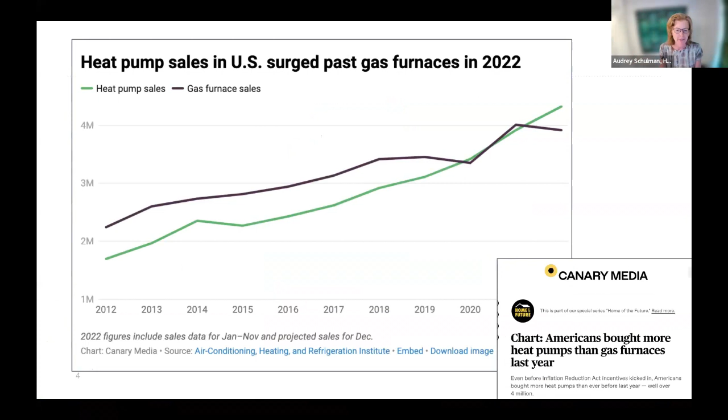So currently in this moment, a lot of us are loving heat pumps because they provide both heating and cooling, and they're a method of reducing our emissions by moving to electricity in an extraordinarily efficient way. So last year, heat pumps actually began to sell more than gas furnaces, which is thrilling.

So the problem with this is that overall, over the 20-year program of doing these pipe replacements, they will be spending more money than the gas infrastructure in the ground is currently worth in its depreciated state, right? And the cost of this infrastructure is amortized over decades and across all gas customers. So our kids and our grandkids are going to have to pay for this stuff.

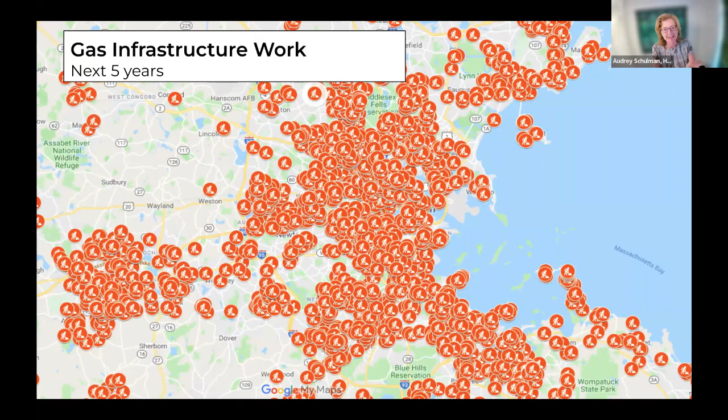And it's totally running counter to our state's net zero emissions mandates. So this is crazy, but the gas utilities have to do it. They're told to do it by the state.

And meanwhile, we have those gas customers who are moving one by one to air source heat pumps, right? And each one of them getting off the gas system does not in any way reduce the gas system's size or operations costs, right? So there's fewer and fewer customers sharing the costs of maintaining that gas system, meaning each person getting off the gas system is increasing the cost for everybody else.

At some point, there's going to be an inflection point hit where gas is going to become more expensive to heat with than air source heat pumps. At that point, there's going to be a rush to get off. The only people left in the end will be those who are low income and renters. They're going to be stuck with just shouldering skyrocketing gas bills. That's not the way we want to transition.

So HEET sort of figured out some of these problems back in 2017. And we began to pitch to gas utilities the idea of instead of installing new gas infrastructure, why not try installing networked ground source heat pumps? I mean, how awesome would that be?

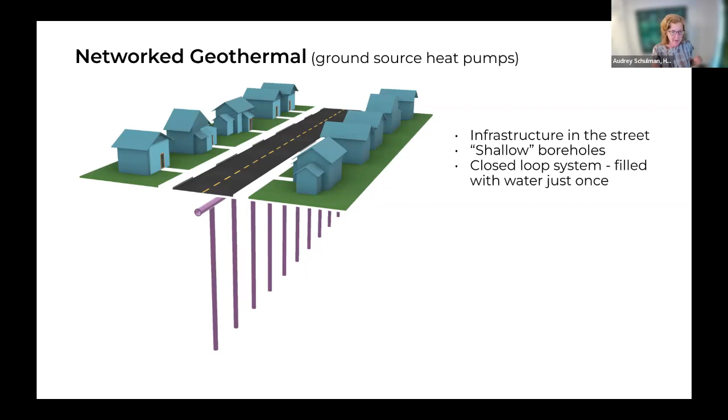So just want to restate, even though we use the word geothermal, it's not going down so far that it's into lava. It's not creating electricity. It's not creating steam. It's not a single building installation of ground source heat pumps, but instead it's networked together.

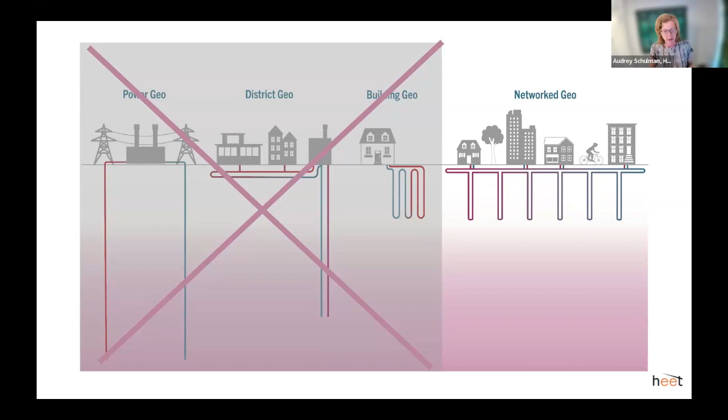And the reason why that's important, I'll get back to that in a second. One of the reasons why it's important is because then the gas utilities can transition whole streets at a time.

And getting economies of scale, everybody in a neighborhood, maintaining that incredibly important ratio of gas customers, or thermal and gas customers, to infrastructure, so that you don't get those skyrocketing energy bills for that last grandma. The other outcomes: it would be safer because it wouldn't have gas in the pipes, right? We all remember the Merrimack Valley gas disaster.

The energy bills, the heating bills, are actually predicted to be lower this way, because currently about half of your gas bill is just paying for the fuel and half of it's paying for the operations and maintenance. And so if we go to this system and the gas utilities install it and amortize it the same way that they normally do, you have the operations and maintenance, but that fuel cost, the gas, goes away, right? So you only have a minimal amount of electricity that you're paying for, because this is the most efficient system known for delivering heating and cooling. And that's why Applied Economics Clinic predicted that the heating bills in Massachusetts should be lower over time than gas.

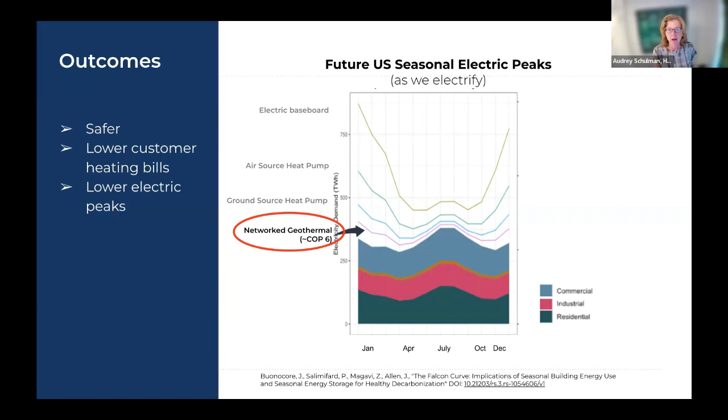And that COP of 6, in case anybody's interested: COP means one energy unit goes in and 6 energy units come out. So you move 6 units of energy into or out of your building for every 1 unit of energy you use. And that comes from an Xcel Energy case study of Colorado Mesa University, which will be out soon, where they look at the actual energy use. And that's the COP they're finding. It's quite amazing. It is incredible.

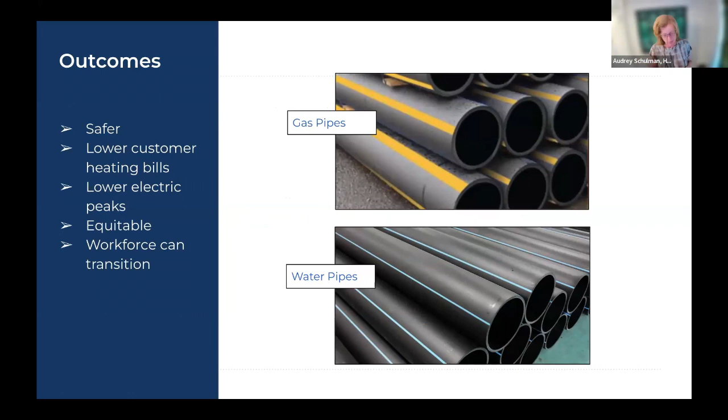Anyway, it also would be very equitable because you're going straight down the street, helping everybody to transition to renewables, and the workforce can also transition because the pipes are exactly the same, right? So they already know how to operate and maintain them. They already know how to install them. And that's why both the pipe fitters nationally, as well as the steel workers in Massachusetts, support this idea.

And finally, of course, the emissions would be lower. So we did a study with Buro Happold. They found that any building connected to the system, as opposed to gas, would reduce its emissions by 60% immediately, and that those emissions, of course, would decline over time as our electric grid moves towards more and more renewables.

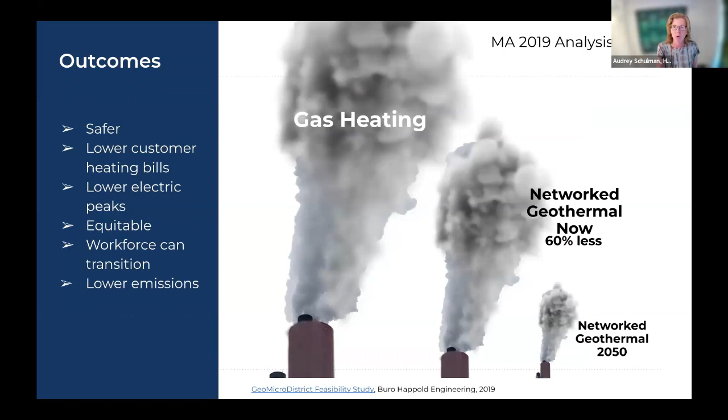So luckily, the gas utilities are actually installing this. Last Monday was the groundbreaking for the first installation with Eversource. It's in Framingham. There's a fire station, part of a school, a few businesses, and a lot of homes. I think it's over 150 units in total, businesses and homes. The installation should be complete this year before the winter season.

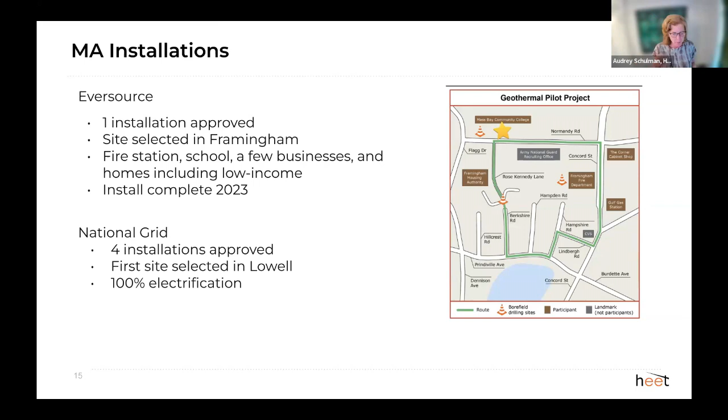And National Grid has 4 different installations approved. The first site is selected in Lowell. And in those sites, they're going to actually be taking all the gas appliances out of the buildings and replacing them with electric appliances. So this is a gas utility that will be electrifying. It's sort of amazing.

So the idea is catching on. There are now feasibility studies or proposed installations in all sorts of different states. Over 100 proposed installations in California alone, which is just breathtaking. There's some legislation that's been passed in New York, the Utility Thermal Network and Jobs Act. It was passed in just 2 months because it was pushed by the trifecta of gas utilities, unions, and environmentalists. Such an unusual situation.

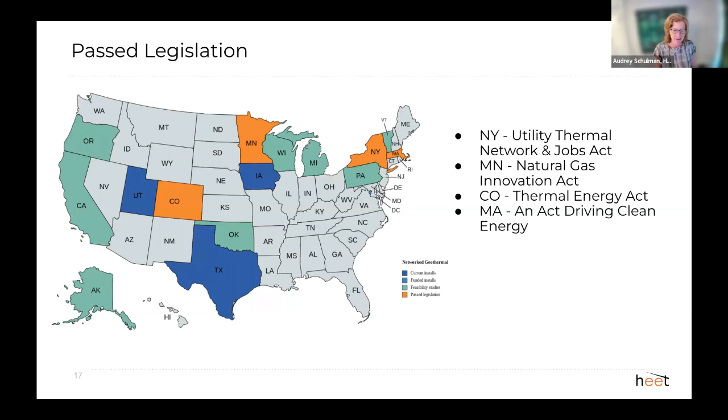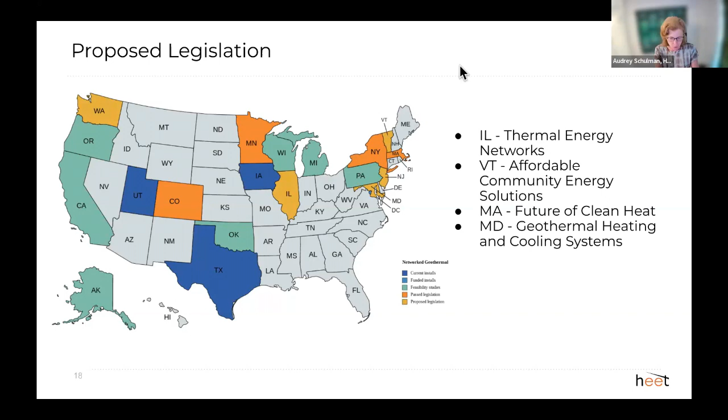There's a lot more proposed legislation, including in Massachusetts, the Future of Clean Heat, which would do all sorts of things to allow gas utilities the opportunity to evolve, without actually, if they screw up, right? But it would give them the opportunity to evolve. There's a lot of supportive advocates working nationally to push this further.

And strangely, and this is one of the strangest things, HEET's been somewhat pushing against gas utilities for almost a decade now. And so it's very strange for me to say that there's actually a gas utility coalition that has formed. There's 14 of them in the coalition, last time I heard. These are all the utilities also that have contacted us, including at this point Gas Technology Institute, which is the research arm of the gas industry. They are doing outreach for us about this idea. It's sort of just mind-blowing.

And in terms of what might interest you, in terms of either community-based or your building or your synagogue or anything, this is the Inflation Reduction Act. You can get up to 50% tax credit if the installation goes with fair labor practices, if it's an EJ area, and if it's with US made materials.

And there's also the Energy Infrastructure Reinvestment Act, which in terms of gas utilities or municipalities or other bigger installations, you can get very low interest rate loans from the Loan Programs Office to do this work, and then use the savings in terms of that decreased interest rate to move it towards customer building retrofits, which is incredible. So

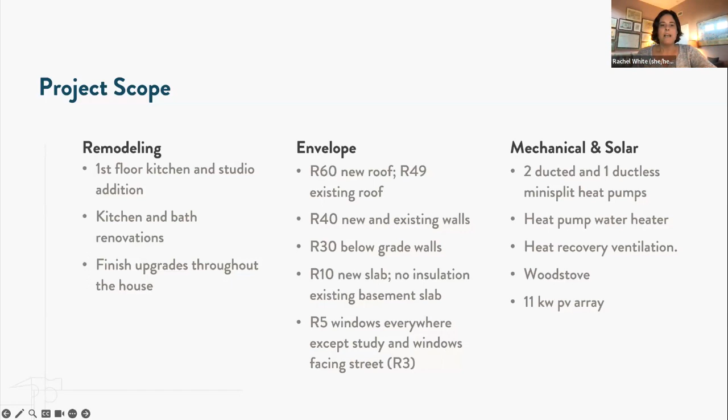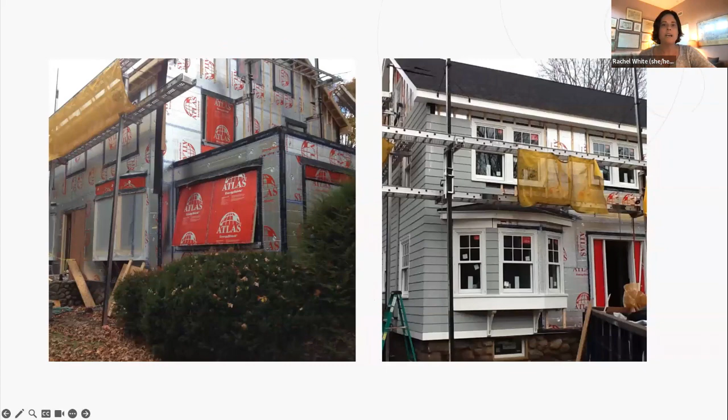We also simplified the building form. If I go back a couple of slides, you see it was a Dutch colonial and we turned it into a regular colonial. But in any event, coupled with the high performance windows, the air sealing that we did, it's a really tight building enclosure, very well insulated, very comfortable with very low heat loss. And the results are really dramatic. Annual energy use was cut by about 75%. Carbon emissions went down by 60%.

I included here the average home in Massachusetts' annual energy consumption, and it's 88 million BTUs a year for you nerds out there. This is from the 2020 Residential Energy Consumption Survey, or RECS. You can Google it. Not all the data is out for that survey, but there's a lot of it, and they stopped doing state by state breakdowns during the Trump administration, but they're back to doing that again. So there were a couple of RECS cycles that did not have any state breakdown data, but now they do. So anyway, I was able to incorporate that.

So this house is using 2/3 less than what the average home in Massachusetts is using. And in its first 8 years of operation, those solar panels have produced 40% more energy than the house consumed. So they're a net positive home, and they built up credit with the utility. This project is extraordinarily successful, not just because it's so low energy, but it's also incredibly comfortable. It's just a better house. It's more resilient.

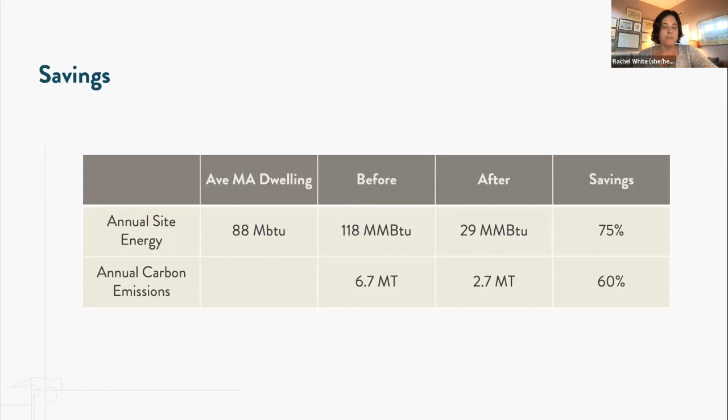And so you might think that we went on from this project to do many more deep energy retrofits, but that's not the case. In fact, we did just one more after this. That was in 2017, and that was the last one. So why? There are a few reasons why we stopped, why we no longer do deep energy retrofits and no longer really recommend this as the most sensible or the best approach for most homes to decarbonize.

The first is that what we have found is that they're incredibly high cost. There was a time back in the late 2000s and early 2010s to 2015 or so, where there were lots of utility incentives for super insulation. Once those went away, it was really hard to convince people to spend money on this. And we found that even if you don't factor in the new roof or the new siding, you're talking 2 times more, sometimes 3 times more the cost of just insulating within the cavities.

Waste: in some cases, roofs have a usable life, an asphalt roof of maybe 20, 25 years, but that's often not the case with some older siding, with some windows that can be refurbished and you can add storms to them. It's not the same as having a triple pane window, but we found ourselves, to do these projects, recommending that people throw away material that has lots of usable life left in it.

Also, as Audrey discussed, it became clear within the past 10 years or so that we need to electrify everything in order to achieve our climate reduction goals, that using less energy and decarbonizing the grid is not enough. We also need to change all of our end uses of energy as much as we possibly can, but especially buildings, to electricity. And then the last reason why we stopped doing deep energy retrofits is because of the upfront carbon emissions associated with doing this work, particularly with foam insulations, which are high emitting materials.

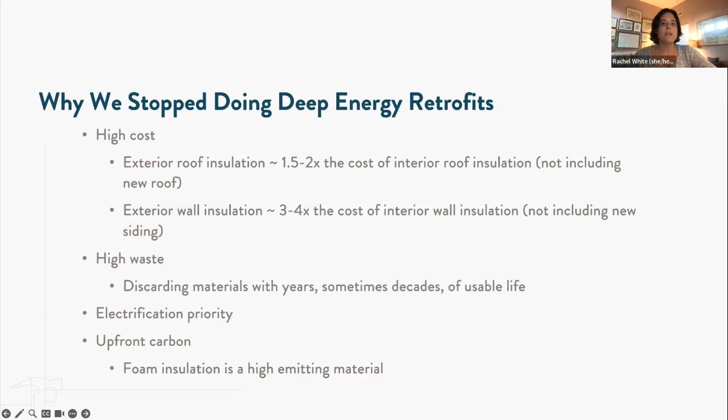So the new approach that we've been doing over the last 6-7 years is what we call a moderate retrofit approach. That's where we insulate and air seal as best as we can within the existing cavities, the existing wall cavities, the underside of the roof. We no longer bother to add insulation to the outside of homes in most cases, and then we electrify them.

So this particular project had a remodeling scope focused on the first floor, kitchen, dining room, living room, turned a powder room into a full bathroom, added a deck. Insulated as best we could from the inside. We insulated the foundation walls; the above grade walls were mostly empty, insulated all of those. There had been some fiberglass batts on the attic floor. We moved the thermal boundary to the roof line and changed out about 40% of the windows. The rest of the windows still are single pane with storms.

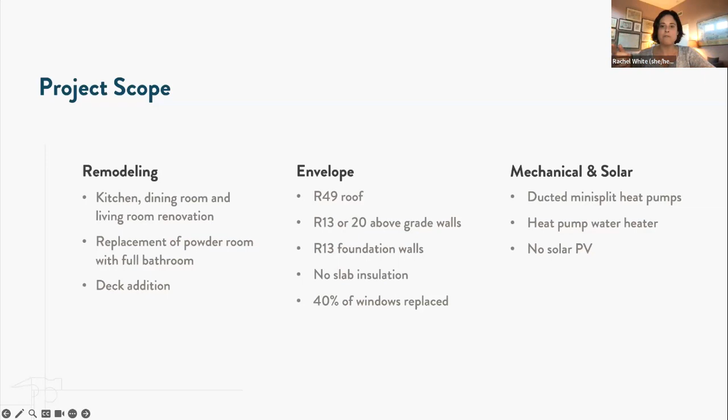And with those measures, as well as some targeted air sealing, we were able to cut the air leakage of this home in half. On the mechanical side, we took out their gas boiler and water heater, got rid of window AC, and installed a ducted mini split, one in the attic to serve the second floor and one in the basement to serve the first floor, and a heat pump water heater.

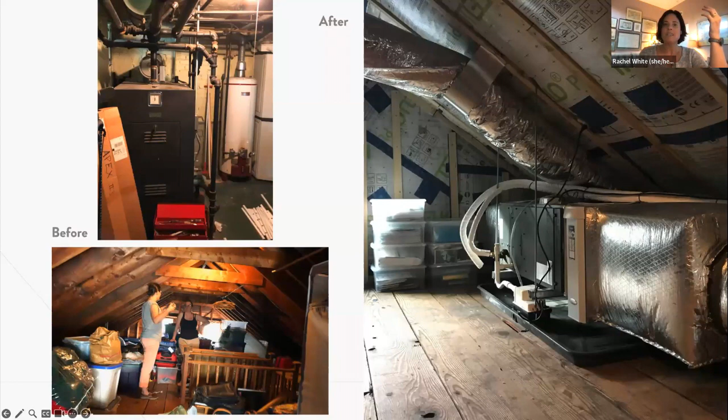So here are some photos of this project. You can see in the top left the gas boiler, which we think was installed in like 1955. And just behind it, an almost as old, if not as old, water heater that was so old our plumber even took a picture of it. On the bottom left, I'm not sure why we included this picture of me talking to the homeowner in the attic, maybe just because of all the stuff they had up there. So in addition to the fact that we wanted to use it for mechanical equipment, putting the thermal boundary at the attic floor was not really a good option for this house. And so you can see in the right the insulation at the roof line with the ducted heat pump below that.

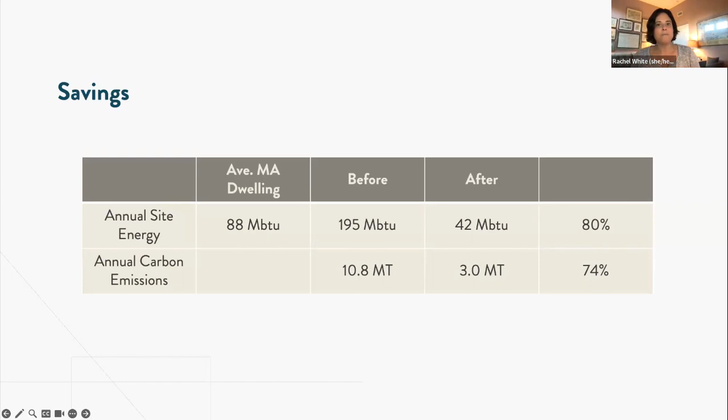So let's look at the impact. This was a house that had a long way to go. You could see from that mechanical equipment, my description of the envelope, that very little had been done to that for a couple of generations. And so when you have farther to go, you have more energy to save. And with these pretty moderate envelope measures, as well as the mechanical upgrades, we cut energy use by 80%. This house is now using half what the average house in Massachusetts uses, and similarly, really dramatic reductions in carbon emissions. Could we have done better with this house if we'd taken off the roof and the siding and replaced all the windows? Sure. Would it have been worth it? I'm not so sure.

I'm going to share one other example. This is a 2020 project where we did a moderate partial retrofit. So we weren't treating the entire building shell. We're only working on part of the building and then electrifying, just to show that you don't have to treat the whole house to make a significant impact.

So for this particular project, again, we had some remodeling scope focused this time also on the first floor. The real opportunity for envelope upgrades was at the roof line. The walls had been insulated, the below grade walls mostly, as well as the above grade walls. But the third floor, which had had a dormer put on, I'm not sure exactly what year, was really not insulated well. And so the opportunity was really up at the roof line.

So I'll show you on the next slide what that work looked like, what we did up there. And then this house had, interestingly, a combination of oil and gas. They had an older oil system that was heating the original part of the house. And then in addition, prior owners had done an addition off the back of the house, I can't remember again what year, and added the dormer on the third floor, installed a gas system to heat that. And there was ducted AC.

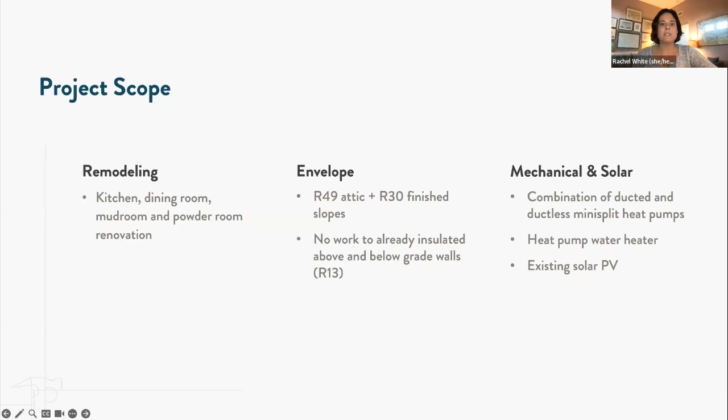So we took all that out and did a combination of ducted and ductless heat pumps, a heat pump water heater. They had some existing solar, so we didn't have anything to do with that. All right, up on that third floor,

so we took out, on the top left, they had an existing hydro air system, and we dense packed with cellulose behind that pre-existing plywood. You can see on the bottom left what they had for insulation up there. It's like a 1 inch maybe batt that was in the ceiling throughout the entire second floor. So we removed that and we dense packed the finished slopes of that third floor and then installed loose fill cellulose in the flat section of the attic.

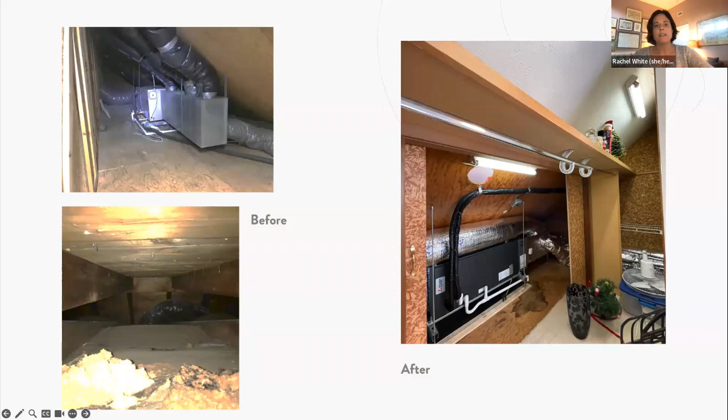And the photo on the right just shows the new ducted air, the air handler that's on the third floor that's serving the bedrooms on the second floor. There are some ductless units in the third floor to serve that space.

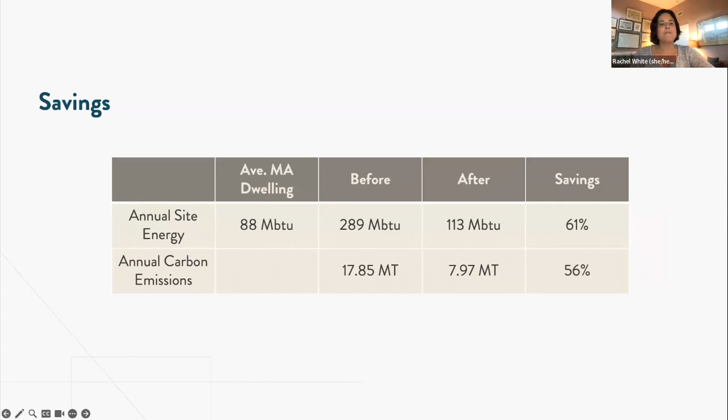With this sort of limited scope on the envelope, we were still able to make really significant reductions in energy use as well as carbon emissions. So the mechanical changeover is driving a lot of that. Emissions going down more than half. This house, you'll note, is still using more than the average Massachusetts dwelling. That is true for many of the homes we work on. But you can see how much it was using before the project. And so, again, we'd like to see it go down further, but we still made a significant impact with that partial envelope work.

All right. Here's the single family home decarbonization. I call it the playbook. I don't know if it's framework, whatever. This is thinking about what you can do with your home right now while you advocate for networked geothermal on the side. So there are 3 pillars. You all probably know what these are. It's efficiency, insulation and air sealing. It's electrification, getting your home off of fossil fuels, and then switching to renewables. You don't have to have a good solar aperture to be part of the renewable revolution. You can sign up for 100% green power.

But how you implement this playbook, where you focus, is going to depend on your building and your opportunities. You might live in a house that's a good candidate for a deep energy retrofit. I would say probably not. I think I've encountered very few of those in all the years that I've been doing this. You have some smaller set of opportunities to take advantage of, some that might make sense now, some that might make sense 5 years from now, depending on the age and condition of your systems and your equipment. And so you do what you can when the time is right.

I'd say in general, what's changed for Byggmeister is that we're investing more in electrification than we used to. We used to invest, as you saw from the 2014 project, a lot more in that first pillar of building efficiency before we would electrify. And I would say what's changed is we're not insisting that we bring a home up to the standards of high performance new construction before we electrify, because we really need to move all of our end uses to electrification.

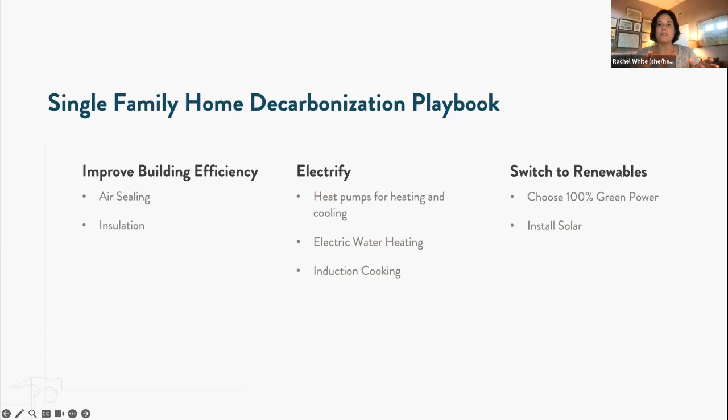Although keeping in mind Audrey's point about the grid, we really do need to pay attention to strain on the grid, which is why the quicker we can move to more efficient uses of electricity, the better. I'm almost tempted to say that this home by home approach of air source heat pumps is like a bridge solution. That phrase has been tainted because of its use by gas, but nevertheless, I do envision a future where we're not looking at building by building solutions for mechanicals, but are looking at a network solution.

I've gone on too long, so I'm going to close quickly. Decarbonization is not an all or nothing. Focus on doing the next best thing for your house. You don't have to super insulate to achieve substantial reductions. You just need to focus.

Everything you do to your home, remodeling project, upgrade to windows, to systems, is an opportunity. And if we were all to think opportunistically and plan ahead so we could take advantage of the opportunities before they pass us by, we might have a chance of meeting our goals.